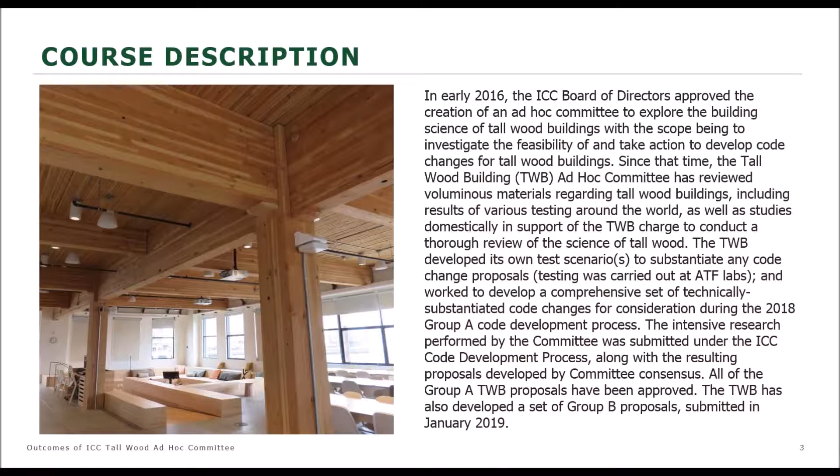Really what we'll talk about today is what is the ICC Ad Hoc Committee on Tall Wood Buildings? Why was it formed? What did they do? Finally, what's the final result or the near final result? Because there are still code changes ongoing in this code change cycle this year. The main focus of the learning today will be knowing about the committee and something about its process, getting a fundamental grasp on the new construction types as they will appear in the 2021 IBC.

That includes their allowable heights and areas, of course, and finally, how appropriate fire resistance is going to be accomplished in these buildings, new provisions for the protection of mass timber with gypsum, and how the gypsum and the non-combustible protection will contribute to the required fire resistance. We'll learn some other things today as well, especially some of the background testing. Jason Smart is with us. He's going to be co-presenting, and he'll be going through what happened in the testing and some of the other fundamental code requirements after I give us this introduction.

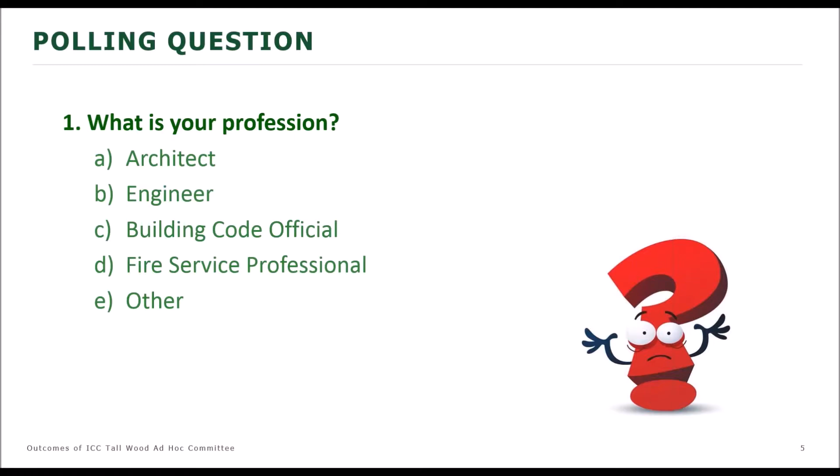Here's an outline for the day. I'll start us off with a little background, a perspective on why a new category of construction called mass timber has developed, a little bit about the old and new engineered wood products involved, and especially about one in particular, cross-laminated timber. We'll move on then to the ICC Tall Wood Building Ad Hoc Committee itself, which the ICC Board of Directors set up to make sure the ICC codes addressed this new system appropriately.

Intuitively, we all knew that with these new systems, the current code requirements, which are based on the assumption of repetitive member framing, traditional joists and studs, were not going to be adequate for this system in terms of parameters and performance. So we'll talk about the committee, its genesis, its work, and the last four items in the outline are the work of the committee. Jason will start in on them, I'll finish them off, ending with building sizes.

You could say that these kind of buildings here are the predecessor to tall mass timber buildings. These are traditional heavy timber buildings, Type 4. These have a long history in many cities and towns across the country and in North America. Most of them are still serving well. They were constructed of solid sawn heavy timber beams and columns. Exterior walls of these buildings are usually non-combustible masonry.

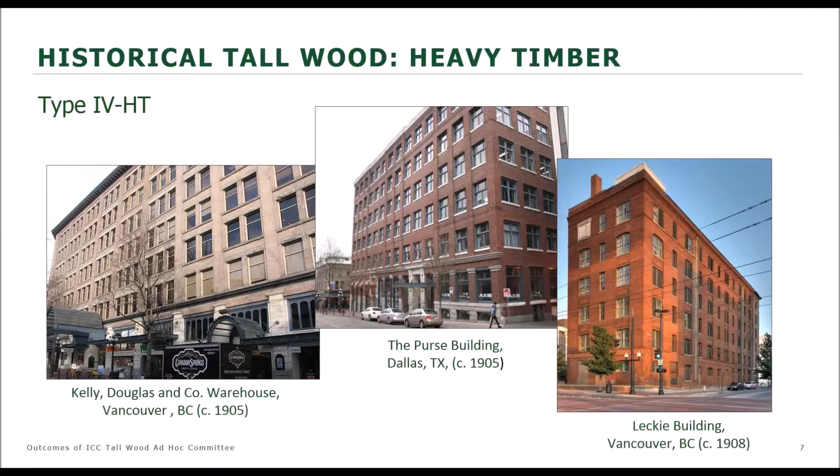Here's a newcomer, the star of the show for mass timber buildings, cross-laminated timber. It represents a sea change in wood construction because of its structural and fire resistance capabilities. They are going to be very different than traditional repetitive member light frame, conventional frame.

CLT, as I'll refer to it, is typically dimension lumber, 2x lumber, laminated in layers, laid up in crosswise fashion, layer upon layer, to make a solid wood floor, solid wood wall or roof. These mass timber panels can be up to 20 inches thick, as long as 60 feet, whatever can be transported down the highway. This one shown here is about 10 inches.

So imagine a building put together as shown on the right, which is a schematic of an actual building in London, Stadthaus building. And you can see that the structural capabilities are going to be far different than traditional repetitive member framing. You'll see from today that the fire resistance characteristics are also very different.

You can see on this slide a little bit of the history of the development of cross-laminated timber, first in France, then Switzerland, Germany. In 1995, press technology developed, making manufacturing easier, more precise. Multi-story buildings in the last years of the 20th century, and then in the first decade of this century, European builders expanded the use of CLT significantly.

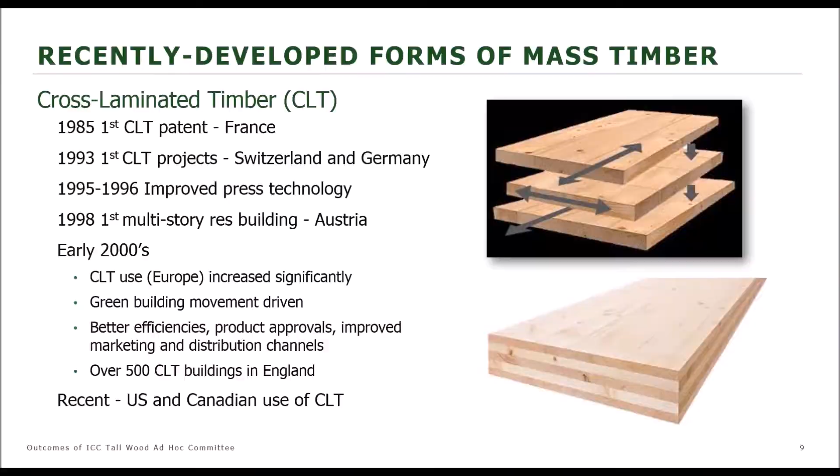I like this photograph because this is a picture of a test facility, a panel being set, lowered into place on the test structure that was constructed for a series of fire tests performed at the Bureau of Alcohol, Tobacco, and Firearms Fire Research Laboratory. And we like this photograph because it shows the scale of what's going on with these big mass timber panels. This one is about 40 feet long, 8 feet wide, 7 inches thick, and weighs about 3 tons, forming the floor ceiling at the top of the test structure.

This panel, by the way, was later repurposed after the testing for construction of residential buildings by architecture students at Yale. So CLT can be used in either horizontal or vertical applications, as walls or as floors. In mass timber buildings, they'll probably be used in conjunction with glue laminated timber. For mass timber floors, the staple will be CLT most likely. We'll talk a little bit more about this test facility and this test series. Jason will cover it well later in the program.

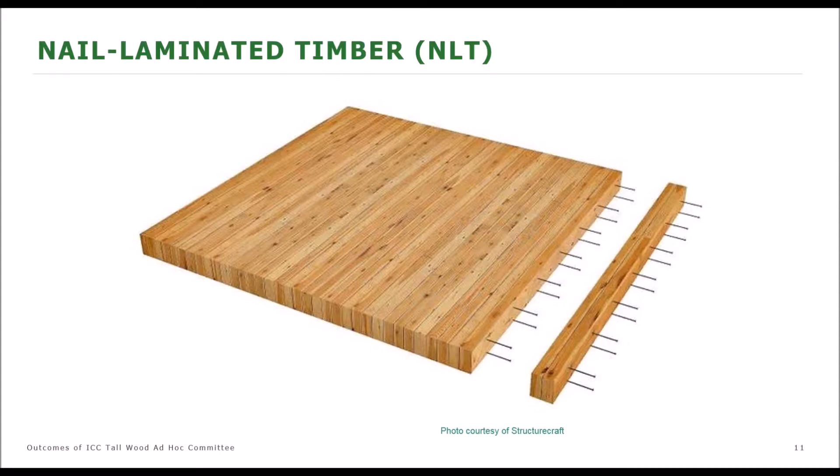There's other mass timber products that are going to be part of mass timber building systems. Nail laminated timber is not a new concept. It's in the code currently as mechanically laminated decking or mechanically laminated timber. It's simply made up of dimension lumber that's nailed together face to face. It can be prefabricated, and often is, and shipped to the site, or it can be actually built on site.

Most of us are very familiar with glulams, glued laminated timber. Beams are well established in design and in the code, and so you're familiar with those. They differ from CLT in that all the layers, the laminated members, are oriented in the same direction. So they do have different structural properties, and CLT, again, is very different in structural properties from glulam.

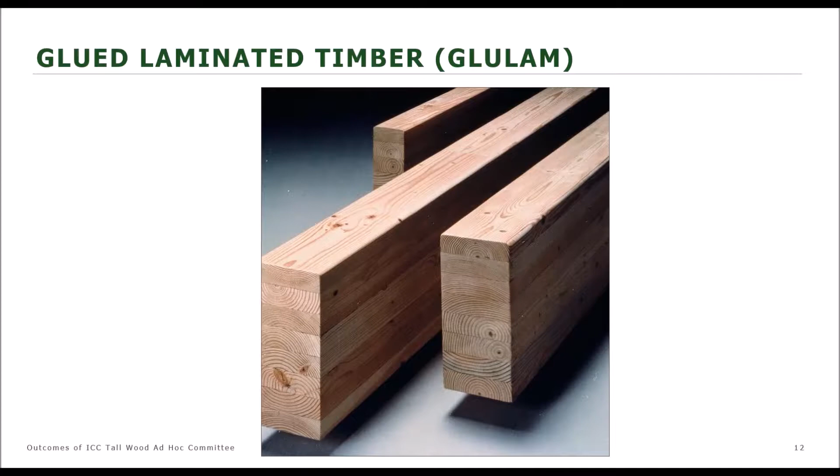But all of a sudden we have a new construction system. It really doesn't fit in the descriptions of light wood frame or traditional heavy timber in the middle. It's the new one right here.

So let's do a poll question, and don't overthink this one. This is pretty easy, pretty light. Go ahead, Marcy. Alrighty. Oh, there we go.

Cross-laminated timber is primarily intended for use in which type of construction? Is that light wood frame, post and beam, mass timber, or all of the above?

So everybody's gravitating toward two answers, so it's going to be one of those two, I would guess. All right, I've got 80% and 30 seconds. So let's see. So 62% say mass timber, 36% say all of the above.

And Paul, what is the real answer? Well, the answer we were aiming for was mass timber. It's a very general question. However, those of you who answered all the above, I could tell you you're right as well, because you can use cross-laminated timber in these other systems. But the intent of the question was just what's it primarily intended for. So well done, everyone.

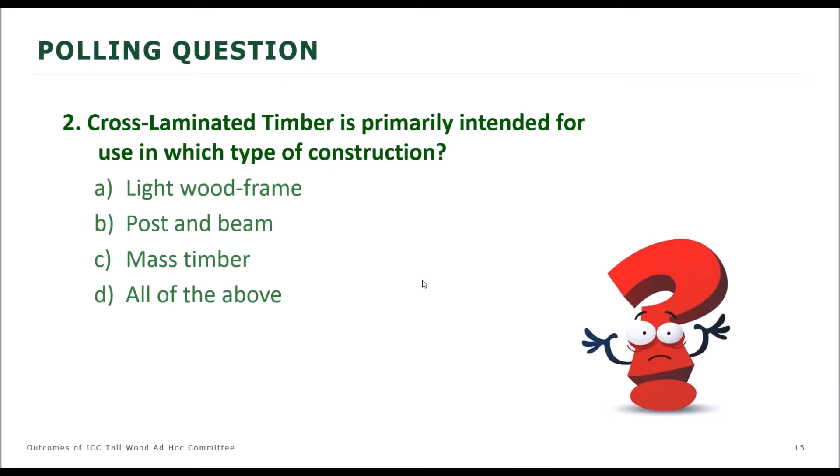Back to our outline. With the new system emerging, it was natural that the International Code Council would want to address it in their codes. The ad hoc committee was assembled. By the way, this picture here is a nail laminated timber floor on top of glulams with glulam columns.

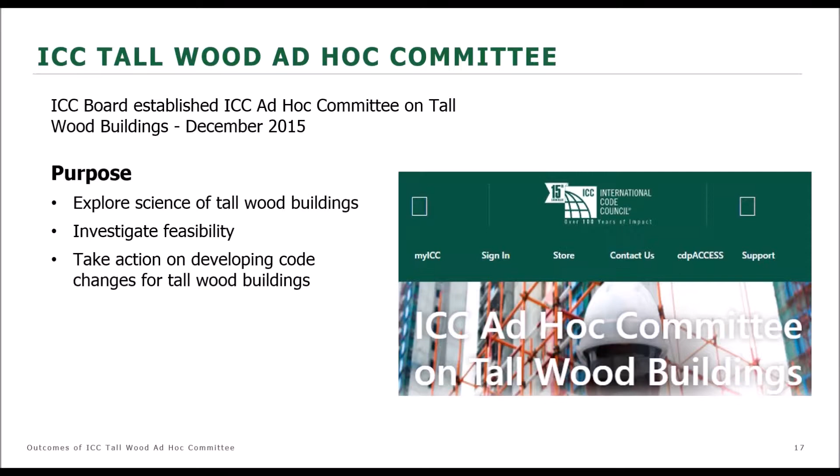So the committee, this was really a significant move for ICC, and actually the code provisions themselves are rather historic, because it's been forever since any new construction types were introduced into the code. But the ICC Board of Directors said, let's explore the science of tall wood buildings, investigate their feasibility from a structural and a safety standpoint, and if warranted, let's take action on developing code changes. Let them come from a consensus committee. And in the end, that turned out to be a very good thing. It was a balanced committee.

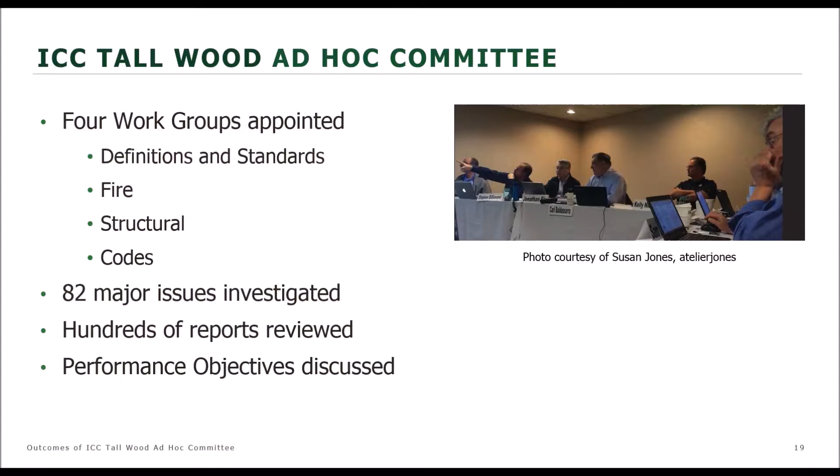The chair of the committee, Steve DiGiovanni, appointed 4 work groups, and they were definitions and standards, fire, structural, and codes. These work groups met together, did some work, came back and presented a total of 82 major issues that should be investigated. Hundreds of smaller issues, hundreds of reports reviewed, and they did identify, first of all, performance objectives for buildings that would exceed the current height limits. In order to begin to contemplate what the code requirements should be, they had to envision how these buildings would behave, and of course fire was one of the primary focuses.

No collapse under reasonable scenarios, a complete burnout of fuel without automatic sprinkler protection considered. Sprinklers are always going to be required in high-rise, but the committee said, if something goes wrong with the sprinklers, the fire department never shows up, let's see how they behave, see how they perform. So it's a very conservative performance objective at the very start. And then how about radiation to and from adjacent properties? If there were a fire, what would happen? Let's look at that.

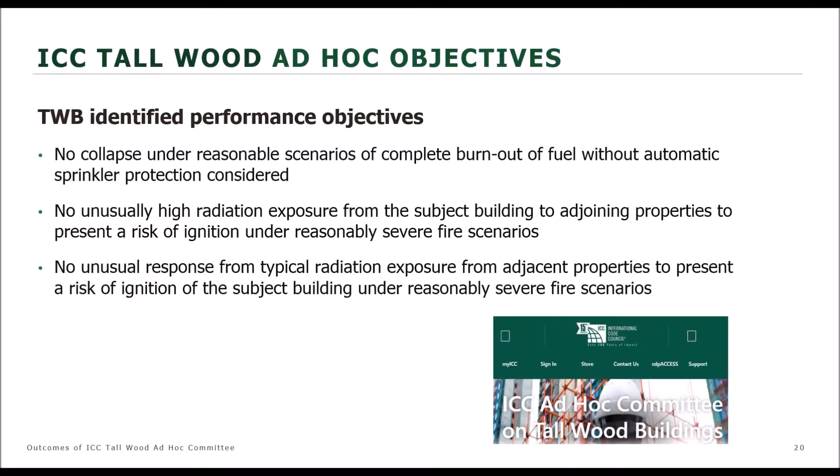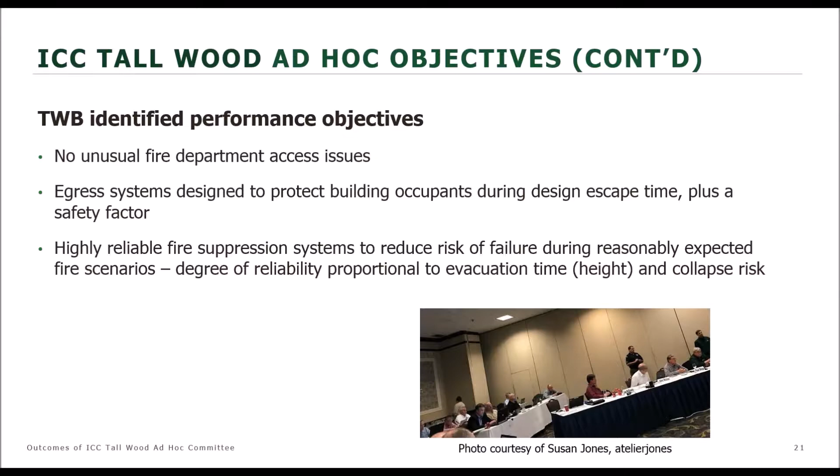No unusual fire department access issues. They wanted to make sure that was paid attention to. Egress systems, just like for all buildings, especially high-rise, designed to get the occupants out, plus a factor of safety. And then finally, suppression systems must be highly reliable, and we'll see even redundant systems in some cases.

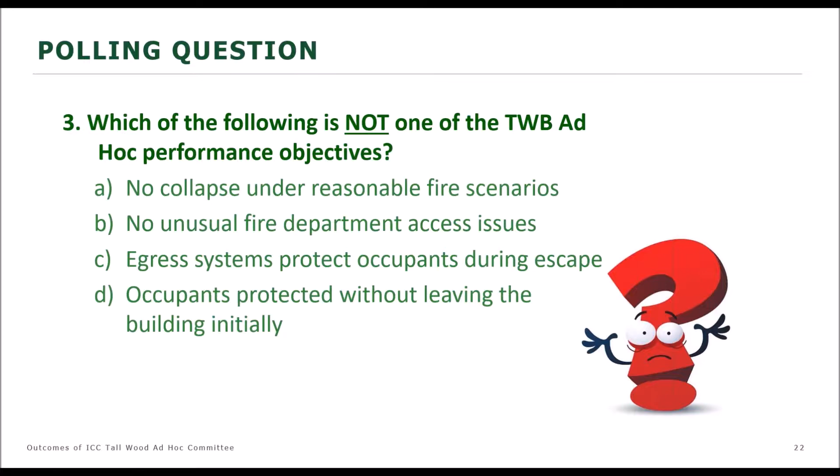I got it, Jason. I think you're on. Okay, great. Sounds good. All right, so yes, that's good.

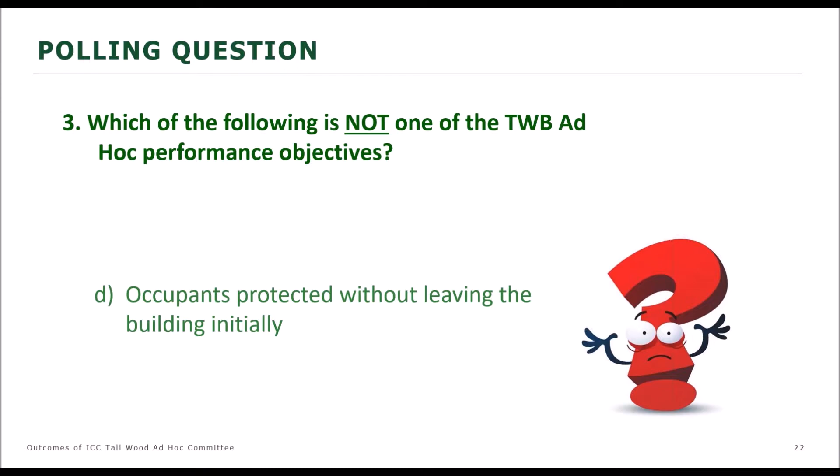I'm glad most people got that right, because obviously occupants should evacuate the building as soon as they're notified of a fire within the building. So that's not one of the design objectives that the TWB ad hoc committee had identified for tall mass timber buildings.

So just to pick up from where Paul left off, I'm first going to describe some of the testing and research that the ICC TWB ad hoc committee considered when developing the mass timber code provisions. Early on, the TWB recognized that it would undoubtedly need testing to validate its proposals. The fire work group, which is a subset of that committee, is one of those 4 work groups that Paul just mentioned a few slides back.

They developed test scenarios, including the physical layout of the test structure, the configurations, and the fuel load. The test structure represented a multi-story condominium or apartment building in which each unit had interior dimensions of 30 feet by 30 feet. So it was basically a square, but there were multiple rooms within each apartment. And we'll show you a floor plan in a minute. There was also a corridor and a stair shaft within the test structure at each level.

The fuel load is based on a North American study of fuel loading for residential use groups. In fact, to ensure rigorous test conditions, furnishings and other combustible contents were added to achieve a fuel load that was equivalent to the mean plus 1 standard deviation. So the actual fuel load used within the test structure corresponded to approximately the 85th percentile of residential fuel loads when compared to that survey.

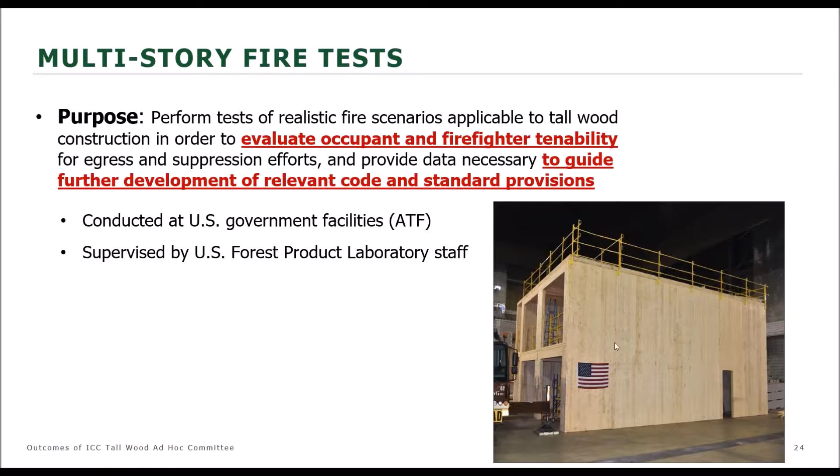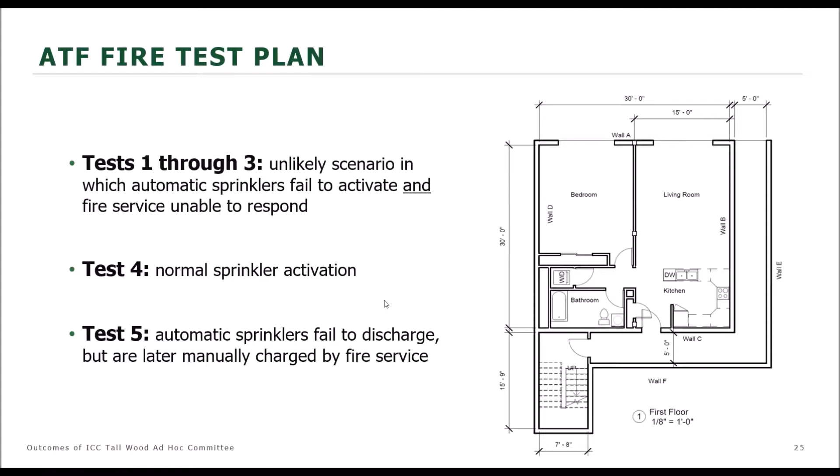Of course, there were some rehabilitations performed between each test in order to repair any damage, such as to the non-combustible protection and so on. But yeah, all 5 of the tests were performed in this same structure. By the way, that's the same structure that Paul showed a photo of as an example of how big CLT panels can be.

So this is the apartment or condo floor plan that was selected by the fire work group for the 5 tests. There was one 900 square foot apartment on each level of the test structure with a corridor leading to a stair shaft on each level. So you can see that these fire tests were truly full scale. It was a full-size apartment or condo on each level.

The TWB Ad Hoc Committee insisted that the construction must be compliant with the current IBC, as well as with all of the proposed code changes that were being developed simultaneously. To achieve this, 20-minute rated entry doors were installed on the apartments, and 90-minute doors were used to separate the stair shaft from the corridors. The corridor was instrumented to determine firefighter tenability and occupant egress tenability within this egress route.

So the scenario represented by the first 3 tests was a highly unlikely one in which you have an unlikely overlap of 2 scenarios. The first part being that the automatic sprinklers fail to activate, and the second part, simultaneously, being that the fire service does not respond at all to suppress the fire throughout the entire duration of the fire. So basically, we're looking at the realm where those 2 scenarios overlap, which makes it even less likely.

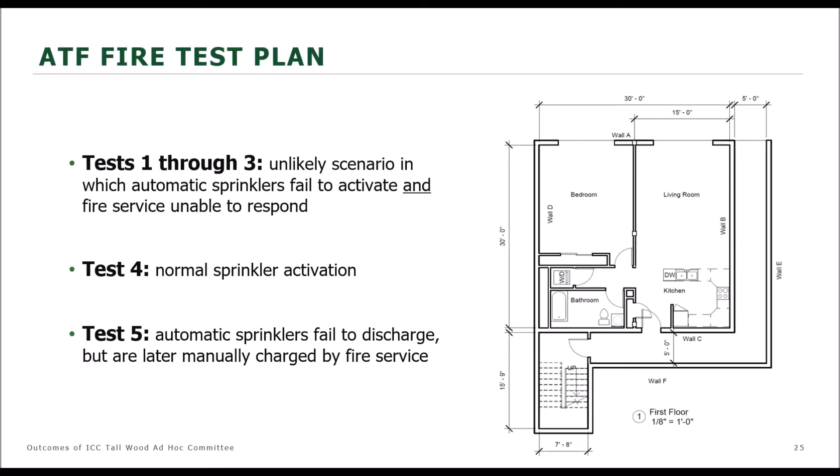And of course, what I'm talking about here is all dealing with the TWB work product and the prescriptive provisions that they developed. They're going to go into the 2021 IBC. I'm not talking about any potential performance-based designs or alternate means and methods or anything like that.

So this is the test matrix for the individual tests within this series. Test 1 served as a baseline to establish the performance of fully protected mass timber. This fully protected configuration represents type 4A construction. And that's what they had envisioned at that point as type 4A. It became known as that later on, actually. But at any rate, test 1 is equivalent to what's now recognized as type 4A.

And then test 2 was an investigation of partially exposed mass timber on the ceiling, representing maximum allowable exposure in type 4B construction. Test 3 was an investigation of exposed mass timber on the walls, again representing the maximum area exposed allowed in type 4B. So tests 2 and 3 were representative of type 4B.

Like I said a minute ago, test 4 looked at sprinkler effectiveness in mass timber construction. It was the shortest lived test. Within about 6 minutes, the sprinklers had effectively extinguished the fire. Test 5 was an investigation of the ability of a manually charged sprinkler system, which is initially incapacitated for some reason, to help control the fully developed fire.

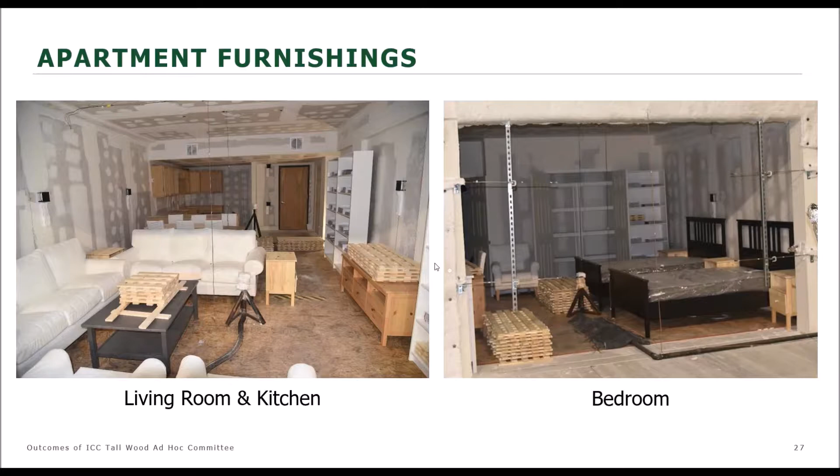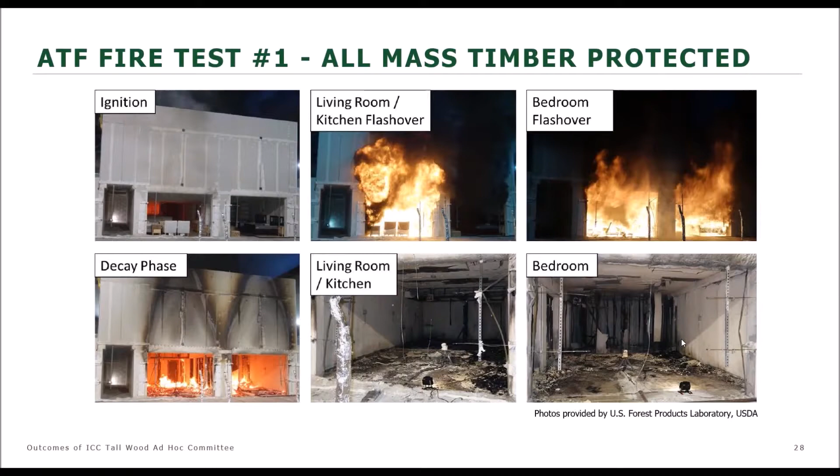In test 2, 30% of the CLT ceiling areas in both the living room and the bedroom were left exposed. This amounted to 20% of the overall floor area of the total apartment. I'll show a slide later on that actually has an excerpt of the code language which specifies these exposed area limits. But 20% is the limit for the ceiling area. So this basically maxed out the allowable exposed ceiling area for Type 4B.

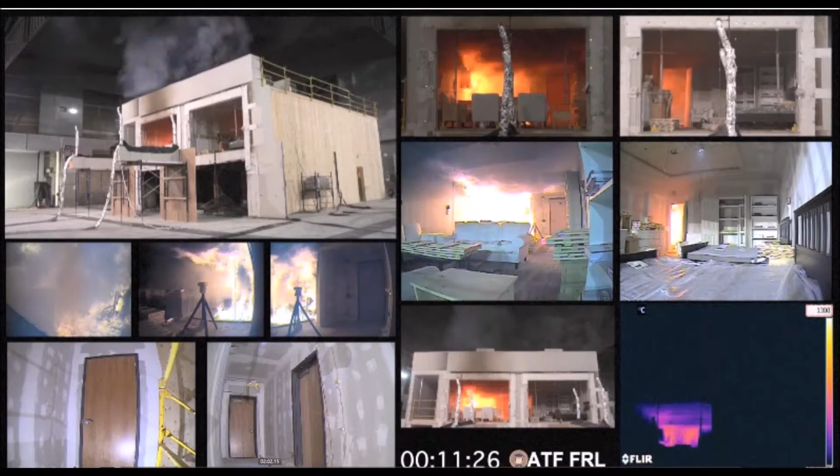I'm going to go ahead and fast forward here a little bit until you'll see it spreading onto the combustible floor covering there. And then I'll fast forward to flashover, which, as I said, occurred at about 12 and a half minutes. And that's right about here. Notice flashover has only occurred now in the left portion there. That's where the living room and kitchen are. Again, the ignition was in the kitchen cabinet, so that makes sense.

And if you look over here in this pane, this is a shot of the bedroom, same with this. You can see the flames and smoke starting to come into the bedroom. The bedroom door was left open, as were all of the interior doors, to allow the fire to spread unhindered. However, the self-closing 20-minute rated entry door into each apartment was left closed for each of these tests, except for one test, which I'll explain later. For each of these first 3 tests, that door was left closed because it would be closed since it's self-closing.

Now we're approaching flashover in the bedroom, which occurred about 4.5 or 5 minutes after flashover occurred in the living room and kitchen. And it just occurred there. You saw the bed start to flash. In this screen, you can see the plumes coming out of both openings now, from the bedroom and from the living room and kitchen. So this is what they'd call the fully developed phase. This is a fully developed fire throughout the entire floor plan of the apartment.

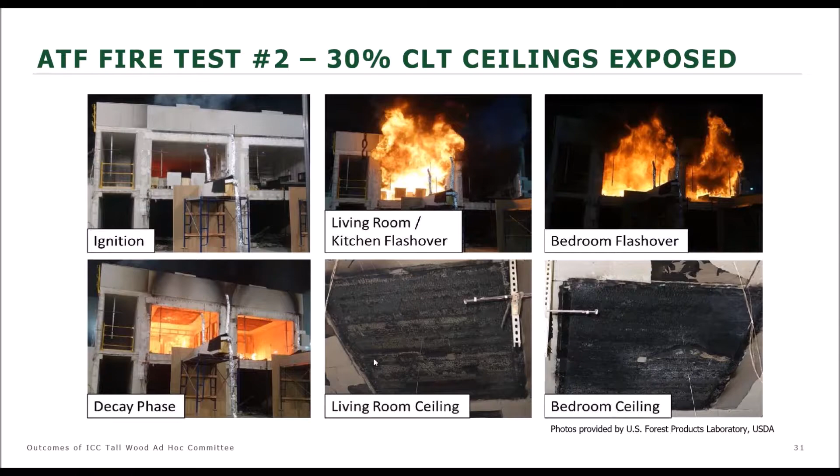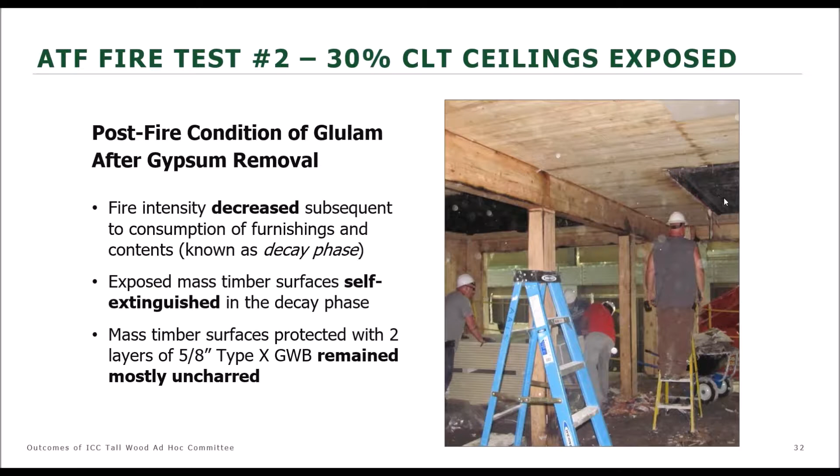In test number 3, wall B was exposed in the living room and wall D was exposed in the bedroom. This layout shows the location of these exposed walls. Notice I say wall D was exposed in the bedroom and wall B was exposed in the living room. I qualify it by saying in the bedroom and in the living room because the exposed portions of walls D and B went from approximately here to about right here. The walls were not exposed in the bathroom or in the kitchen. And then same with wall B, the exposed portion went from about right here where the living room starts to where it intersects wall A. That amounted to about 40% of the total wall area.

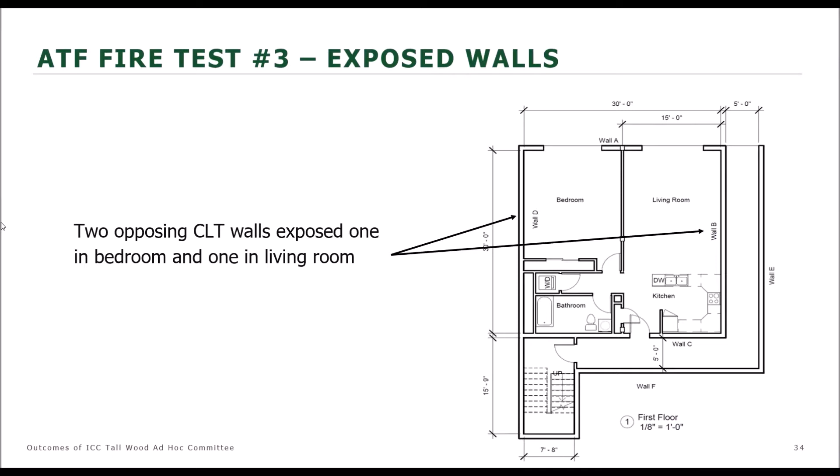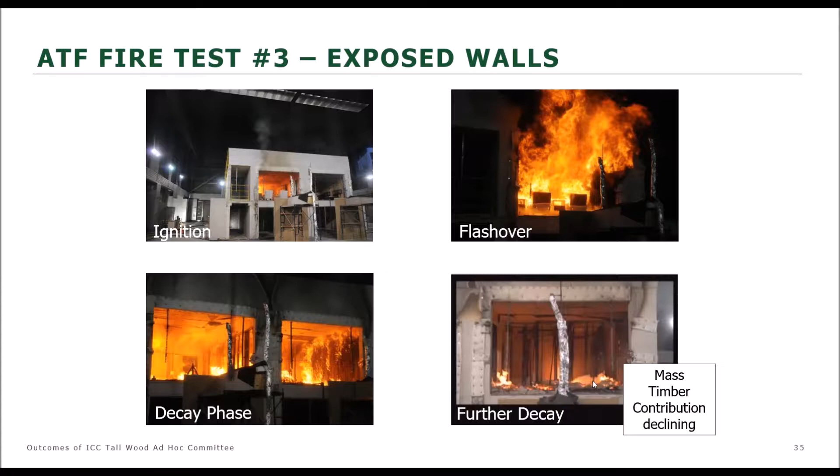Just like for test 4, in test 5, all mass timber surfaces were fully exposed in both the bedroom and the living room. The sprinklers were purposefully prevented from discharging in test 5, though, and then they were manually charged 20 minutes after the time at which the sprinklers automatically activated in test 4. This simulated a scenario in which the sprinklers fail to activate automatically, but are then manually charged at the fire department connection by the fire service upon their arrival at the scene.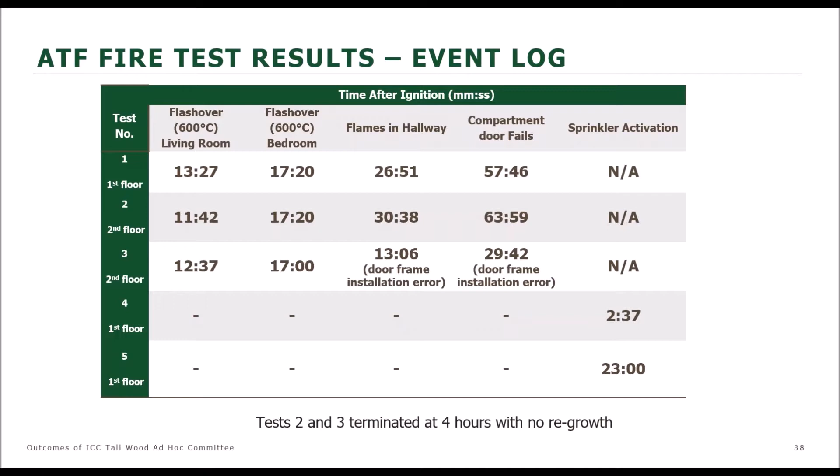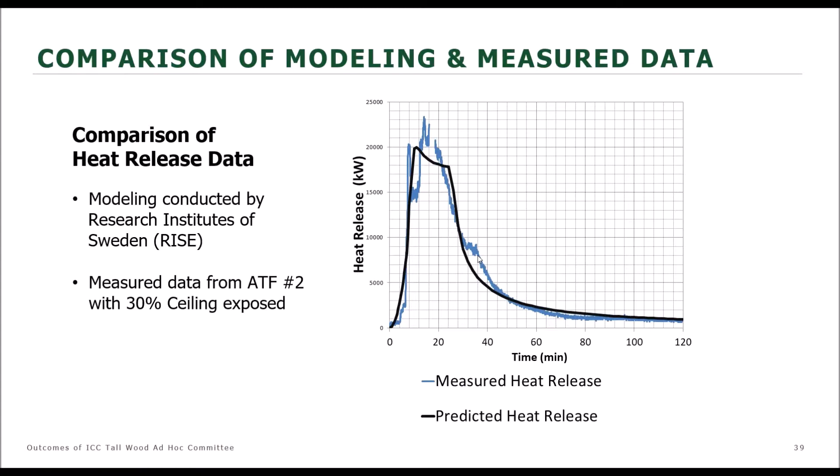The full report that details the results of this test series was published by the U.S. Forest Products Laboratory in 2018, and it's available on their website at this address here, or you can just go onto the FPL website and do a search for GTR 247. All of the tests were also recorded, and these videos are available for free public viewing, either at regular speed or the time-lapse versions like the one that we watched of test 2. You can get to these time-lapse versions through a link on the AWC webpage, specifically the Tall Mass Timber webpage on the AWC website.

So now let's move on to the TWB work product and the resulting new code provisions. The committee decided to approach their work by first defining new types of construction, as Paul alluded to. The proposed new types of construction are created in existing section 602.4 of the IBC. The TWB committee developed a total of 14 code change proposals under the 2018 Group A cycle.

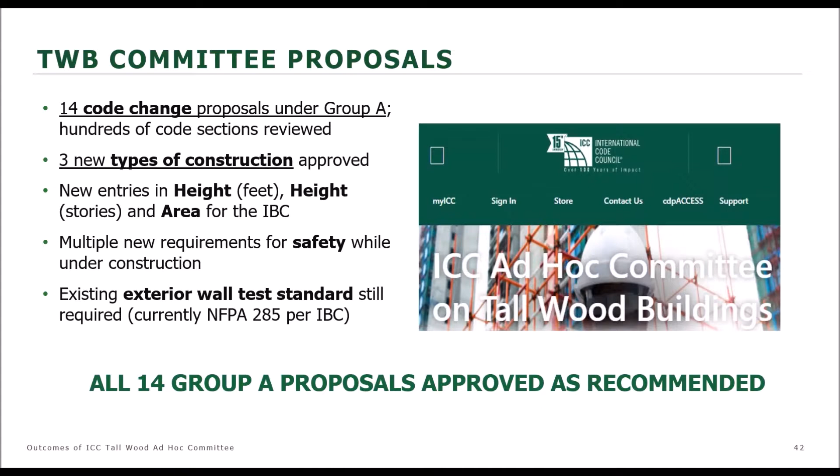The TWB committee found it necessary to develop a couple of new definitions for new terms for inclusion within Chapter 2 of the IBC. Specifically, these are mass timber and non-combustible protection for mass timber. The definition for mass timber is based on the same minimum cross-sectional dimensions that apply to traditional heavy timber. It should be noted that a code change in the last cycle for the 2018 IBC moved those dimensions and other related information back into Chapter 23, which deals with wood construction.

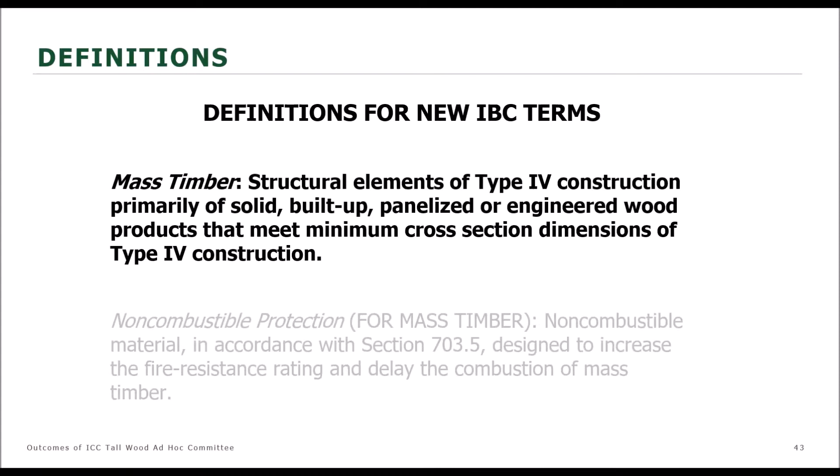It was also necessary to develop a definition for the term non-combustible protection because this term is now used pretty extensively in the new provisions that detail mass timber construction. It applies specifically to mass timber construction, and it is different from other forms of fire protection. Non-combustible protection is designed to increase the fire resistance rating of the mass timber to which it is applied, and also to delay the combustion of that mass timber. We'll talk more about this a little later.

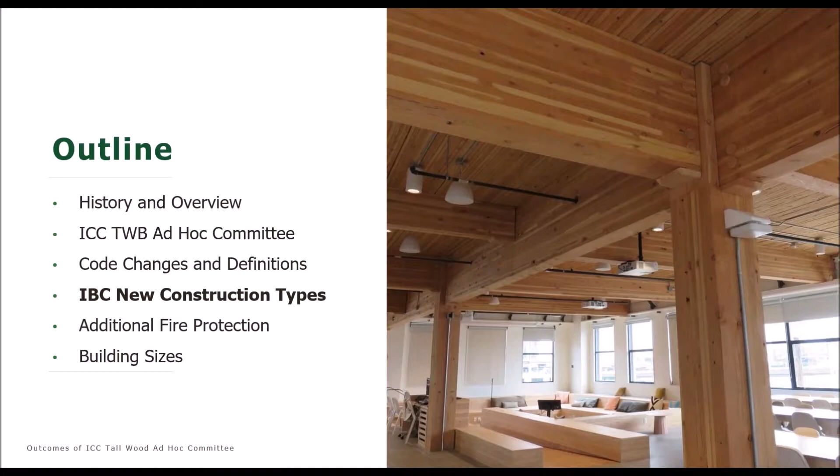Moving on to the meat of the new provisions, let's talk about the new mass timber construction types and the various prescriptive requirements associated with them. 3 new types of construction are described here. They are designated as types 4A, B, and C. Let's look at them each individually now.

And by the way, I wanted to point out these icons here for ease of understanding. On the next several slides, if what I'm talking about only applies to type 4A, then it'll have just this blue icon. If it only applies to type 4B, it'll only have this green icon, and then likewise type 4C will have this icon. If it applies to all 3, then you'll see all 3.

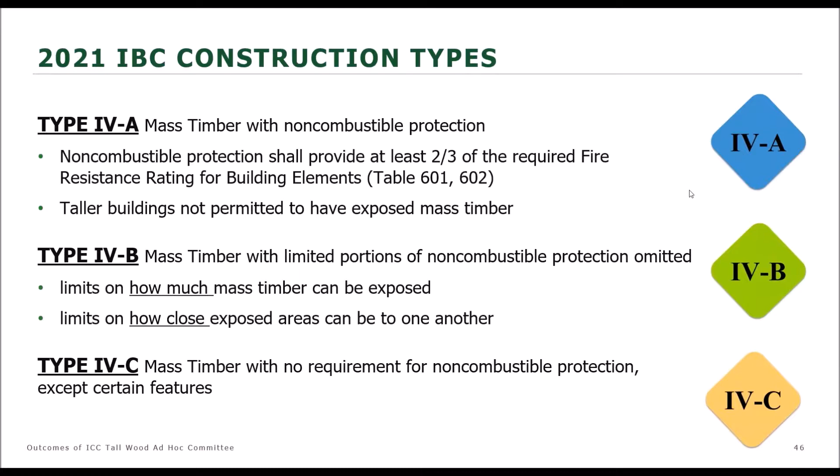The TWB began by acknowledging that fully protected mass timber performed like type 1A construction from a fire standpoint. Thus, they chose to call that fully protected condition type 4A to make it analogous. And in keeping with this analogy, type 4A also requires the fire resistance ratings that are the same as those required for type 1A. But an additional requirement for type 4A that doesn't apply to type 1A is that no less than 2/3 of that fire resistance must come from non-combustible protection. We'll talk about what non-combustible protection is. I kind of went through the definition, but we'll get into more details on exactly what that means later on.

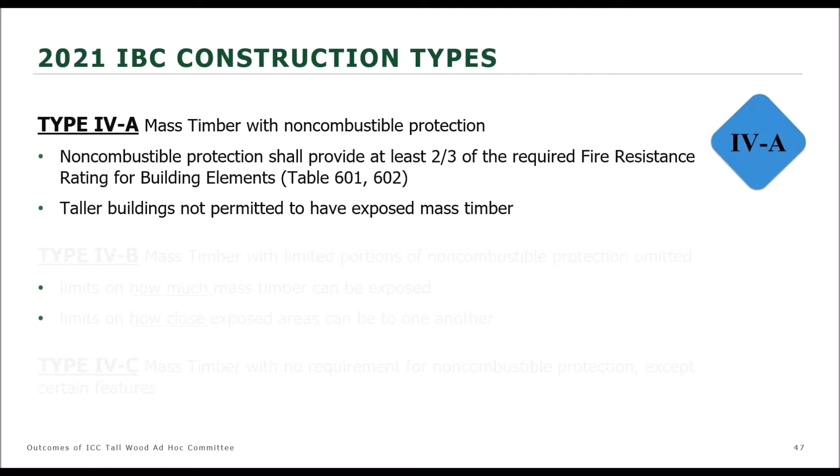Because the mass timber elements will be fairly large for structural purposes, they also have inherently a significant degree of fire resistance even without the non-combustible protection. This fact has been recognized of heavy timber construction for over 100 years. It should be noted that because of the height limitations for types 4B and 4C, which are more strict than that for type 4A, the taller buildings, and by taller here I'm referring to between 12 and 18 stories, will only be permitted prescriptively under type 4A, which doesn't allow any exposed mass timber. So really the tall mass timber buildings, the ones higher than 12 stories, will not have any exposed mass timber if built prescriptively.

A similar correlation was drawn to type 1B. So the partially protected condition was called type 4B, to continue with that analogy. Type 4B is like type 4A, except that non-combustible protection may be omitted in certain locations. And we'll talk more about the limitations on those permitted omissions. And of course, as I just mentioned, the height limitations for type 4B are more restrictive than for type 4A. From a fire safety standpoint, these height and area limits counterbalance the fact that you can have mass timber surfaces exposed in certain limited areas in type 4B. The new code provisions place specific limits on how much area of the mass timber can be exposed on various surfaces, and also how close those areas can be to one another.

Type 4C requires non-combustible protection only in certain locations, such as concealed spaces, stair shafts, and the outside face of exterior walls. That said, it is still required to achieve the fire resistance ratings of tables 601 and 602 by its own characteristics, meaning the inherent fire resistance of the mass timber itself. In exposed areas, fire resistance is primarily achieved by additional wood cover that is above and beyond that which is required to carry the structural load. These fire resistance ratings are the same as those that are required of types 1B and 4B, which we'll look at now.

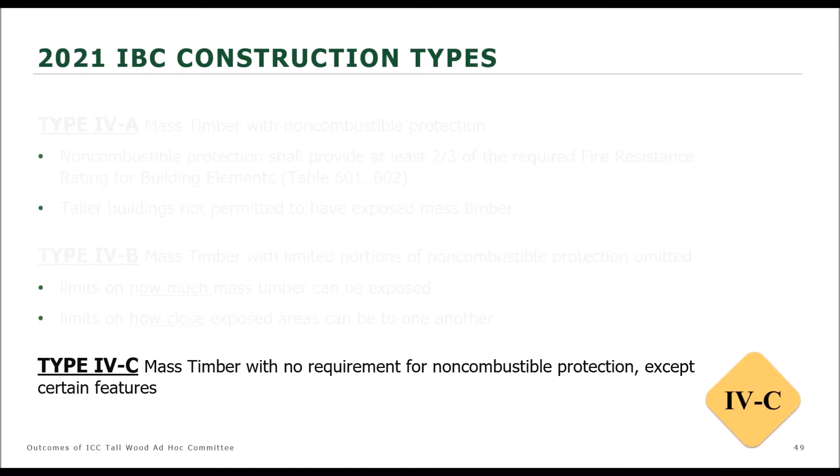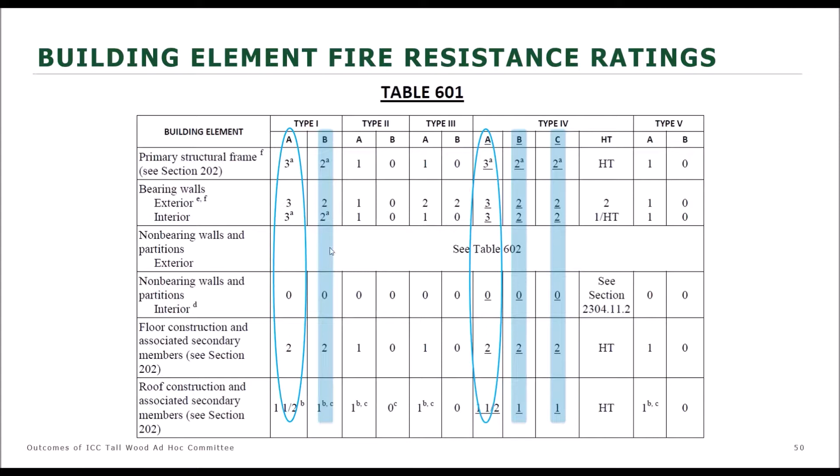As for the existing Type 4 construction using heavy timber, the TWB committee made a decision not to make any changes to this construction type. That is, other than to change the designation to add the -HT to the end of it in order to better distinguish it from the new Type 4 construction types.

This type of construction has existed for many decades. I'm talking about Type 4 HT now. And so the committee just decided to leave well enough alone here. One of the reasons I point this out is because I want to stress that the new mass timber construction types 4A, B, and C, are not the same as Type 4 HT. There are some significant differences between them, and we'll talk about those unique aspects for the new mass timber types of construction in the next few slides.

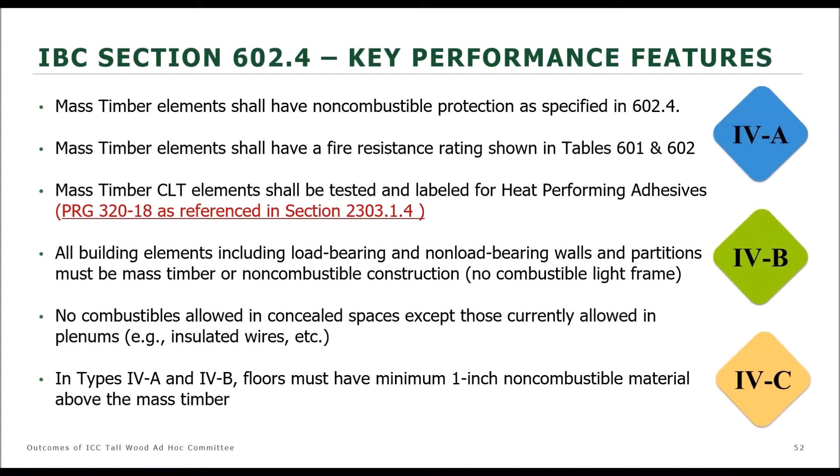In fact, no combustibles are allowed in any of the concealed spaces, except for materials that are currently allowed in plenums by the International Mechanical Code and NFPA 13. An example of this would be insulated wires, so that they would be allowed, but no combustibles such as light frame wood or anything like that in the concealed spaces.

Here's an excerpt from section 602.4, which applies to all three of the new construction types. At the top of this excerpt, you can see the provision requiring CLT to be qualified in accordance with PRG 320-2018. PRG 320, by the way, is the material standard that is referenced in the IBC for CLT. So any CLT used prescriptively under the IBC is required to comply with PRG 320. And specifically, the 2018 version is what's going to be referenced for CLT used under the 2021 IBC, which is where this provision is going.

As you can see from the strike through and underline here in this slide, this paragraph was modified through a floor mod at the code hearings. This modification was considered acceptable because the 2018 version of PRG 320 included adhesive qualification tests to prohibit heat delaminating adhesives. So it actually provides a more comprehensive and robust means of addressing the issue than the previously proposed language did. And it effectively prohibits use of adhesives which can undergo heat delamination, leading to the type of fire regrowth that the committee was concerned with, the TWB committee.

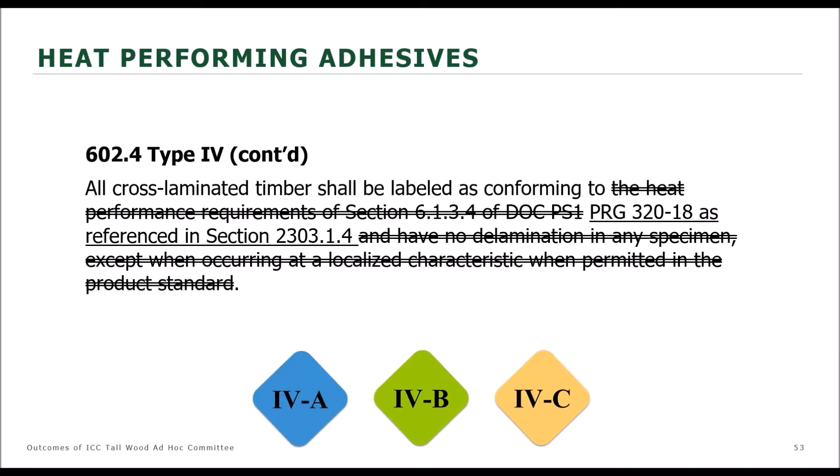Regarding shafts, elevator hoistways, and the like, in buildings up to 12 stories, interior exits, elevator hoistways, and shafts are permitted to be constructed of mass timber elements. However, those mass timber elements are required to be protected with non-combustible protection. And then in buildings taller than 12 stories, interior exits and elevator hoistways are required to be constructed of non-combustible materials. An example of this can be seen in the 18-story Brock Commons building in British Columbia, which Paul showed on the first slide of this presentation, and he talked a little bit about. It has reinforced concrete shafts.

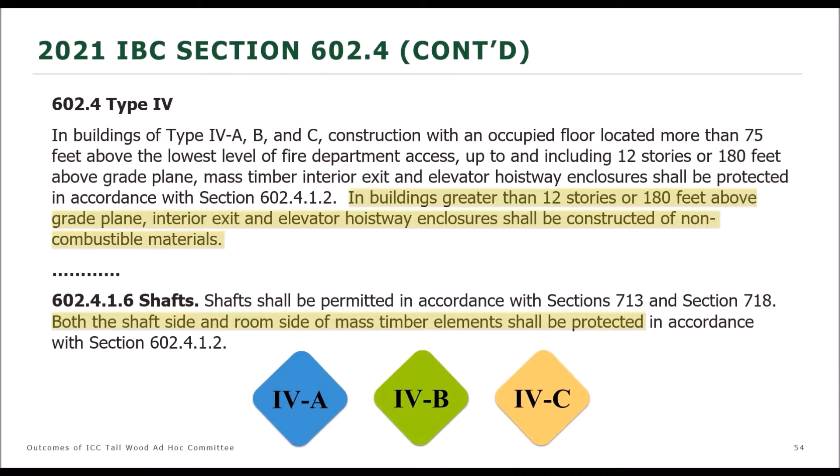In all three of the new construction types, everything outboard of the mass timber and the exterior walls is required to be non-combustible, except for a WRB, a water-resistive barrier, which is required to meet certain fire performance thresholds. Also, mass timber walls are required to have at least one layer of 5/8" type X gypsum board or equivalent non-combustible protection on the outside. I'll note that on top of that, additional non-combustible protection is required where Table 602 stipulates a fire resistance rating of greater than 1 hour.

So if Table 602 says you have to have greater than 1 hour fire resistance rating from the exterior side on exterior walls, then you'll actually need more than just one layer of 5/8" type X on that exterior side or exterior face of the mass timber in the exterior walls.

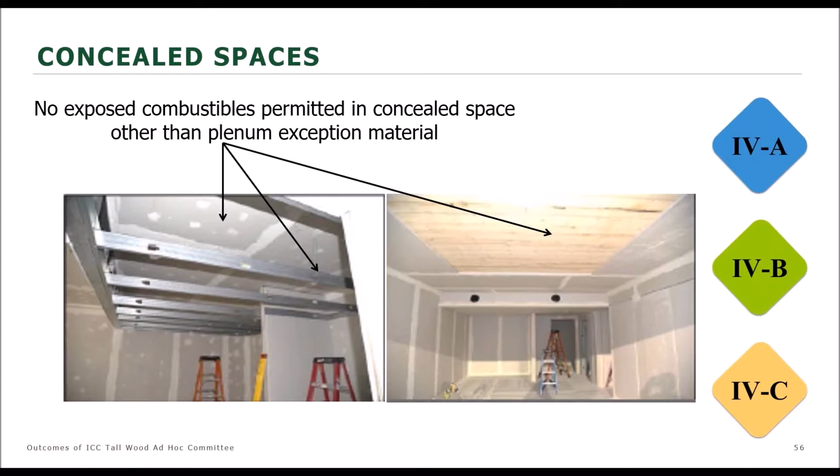So now let's take a look at some of the other provisions that are specific to just one or two of the new construction types rather than all three. First, we'll talk about those that are specific to type 4A. All mass timber surfaces in type 4A are required to be protected with non-combustible protection. There's no exceptions in type 4A. And that non-combustible protection has to be sufficient to provide at least 2/3 of the required fire resistance rating.

You can never have less than 2 layers of 5/8" type X gypsum on interior surfaces, or equivalent non-combustible protection to 2 layers of 5/8" type X. Also, mass timber floors must have a minimum 1-inch thick non-combustible topping. Typical examples of this 1-inch thick non-combustible topping would include cast-in-place concrete or gypsum concrete.

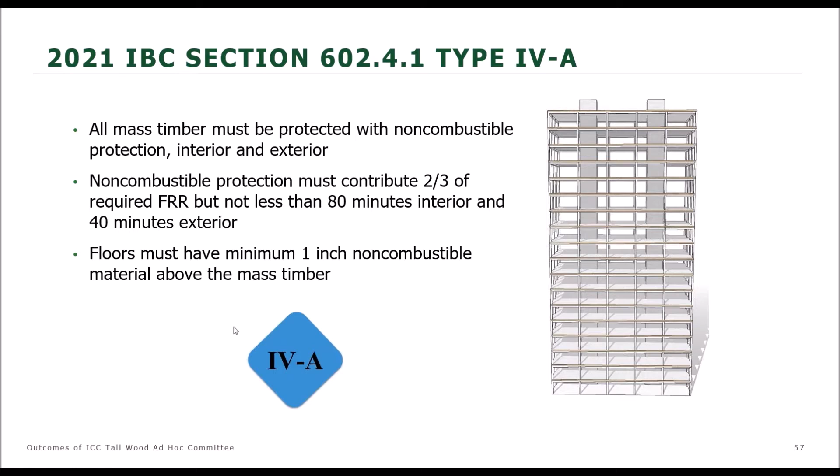By the way, this requirement for the 1-inch non-combustible material over the mass timber floor doesn't just apply to 4A, it also applies to 4B. Just as in type 4A, mass timber surfaces in type 4B construction are also required to have non-combustible protection providing 2/3 of the fire resistance rating. However, there are exceptions in type 4B.

But there's a limit, and I'll get to the equation that shows exactly what that limit is in just a minute. But first, let me show that there's a fourth exception that can apply simultaneously with either of these first three. And that is that mass timber columns and beams, which are not an integral part of walls or ceilings, are allowed to be left unprotected. And that applies, of course, to type 4B. The TWB committee felt that this was justifiable because typically the total surface area of standalone columns and standalone beams is relatively small compared to the area of walls and ceilings.

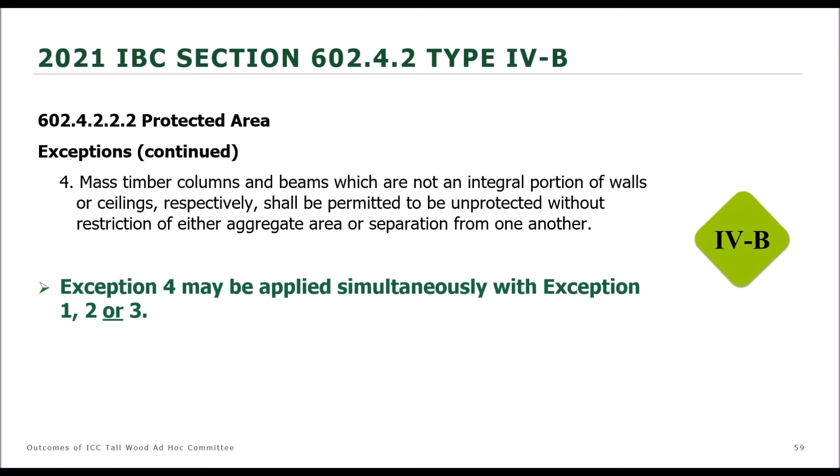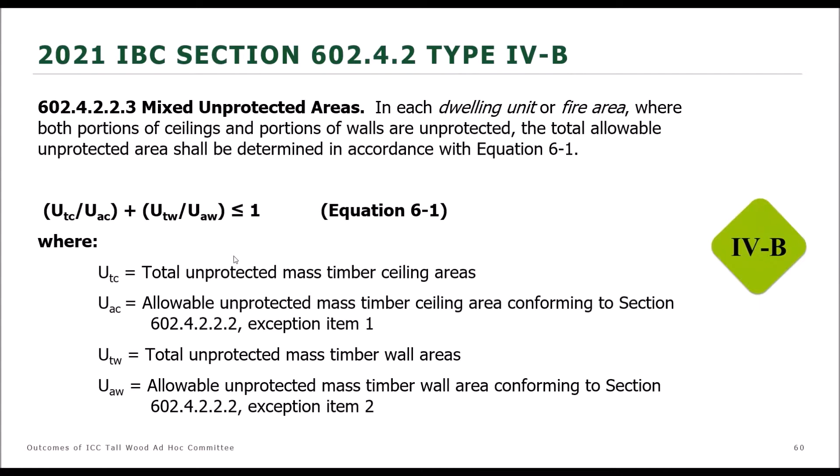Also, if the combination wall ceiling exposure option is used, the exposed portions of walls and ceilings must be separated by at least 15 feet from one another. This minimum 15-foot distance is measured horizontally between the exposed areas of mass timber.

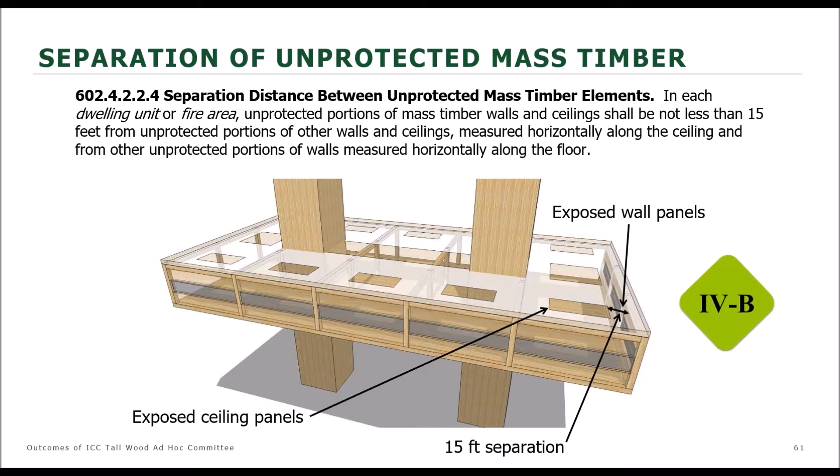Obviously, this is intended to reduce the amount of potential radiative heat flux that one area might receive from another in the event of a fire. And then lastly, there's type 4C.

Type 4C is sometimes described as a mass timber construction type in which all of the mass timber surfaces are unprotected. However, I like to point out that this is actually an incorrect generalization. Non-combustible protection is actually required in numerous locations within type 4C construction. And these include, as I touched upon earlier, the outside surfaces of mass timber in exterior walls, and then also mass timber surfaces within concealed spaces, and also both the inside and outside surfaces of mass timber within

shafts. Also, while non-combustible toppings are not required for mass timber floors in type 4C like they are in types 4A and 4B, there is a requirement that floors in type 4C are required to meet the provisions of IBC section 804. This section applies, of course, generally to other types of construction as well.

So with that, it's been a while since we've had a polling question. I'll hand it back to you, Marcy, to ask this one. Sure thing. So which of the following are proposed new types of construction? Is that 4A, 4B, and 4C? Or is it 4 heavy timber? Or 1 heavy timber, 2 heavy timber, and 3 heavy timber? Or all of the above?

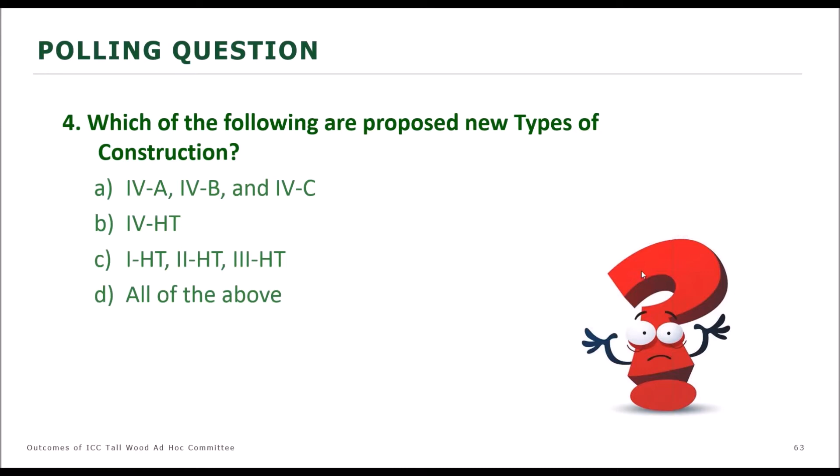Okay, thanks, Marcy. Great job, Jason. Let's get off that screen.

So we have some additional fire safety features we want to talk about for the new mass timber construction. And I want to emphasize one of the principles here, and that is, this is a new principle. It only applies to mass timber in the code. We're all used to tested assemblies that achieve fire resistance. We're used to calculating fire resistance of exposed mass timber or exposed heavy timber elements. But this principle, this is the code text, and Jason explained this. I just want to reemphasize.

The fire resistance rating of mass timber elements consists of the fire resistance of the unprotected element added to the protection time of the non-combustible protection. So for instance, if the floor is a 2-hour floor, there may be some inherent fire resistance or designed fire resistance in the exposed floor. You can add that to what's provided with the gypsum to get the total fire resistance. There's 2 ways to do this, by the way.

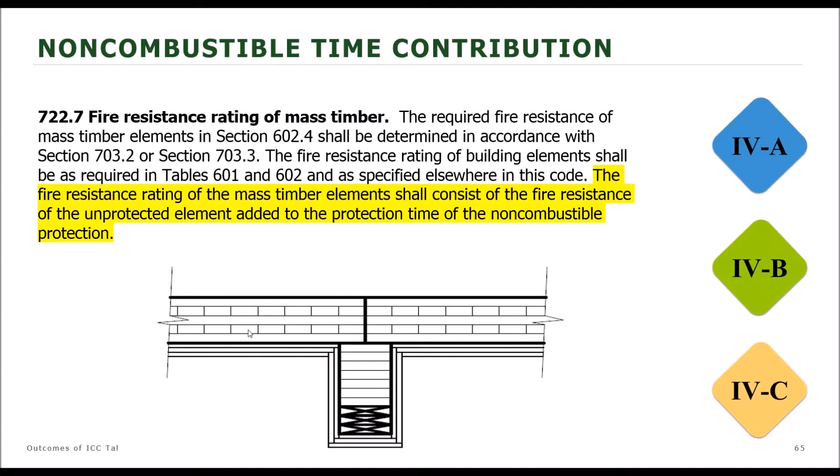So the question is, how do we determine the amount of fire resistance provided by the non-combustible protection? One way to do that is by testing. You set up a test program where you're testing the unprotected element, like the unprotected CLT floor, and you test it to failure by ASTM E119 or UL 263. Take the same element, protect it with non-combustibles, test it again. The difference in fire resistance rating time to failure, that's the amount of contribution the non-combustible protection is providing.

The general principle, as we said, is it must provide at least 2/3 of the overall required rating of the element. There's also a prescriptive option for achieving this. So in Chapter 7, you'll see 2 new tables. Fire resistance rating of the element over here, required contribution from the non-combustible protection in minutes over here. You want to know how many minutes you get with these types of gypsum wallboard? Here they are. Right.

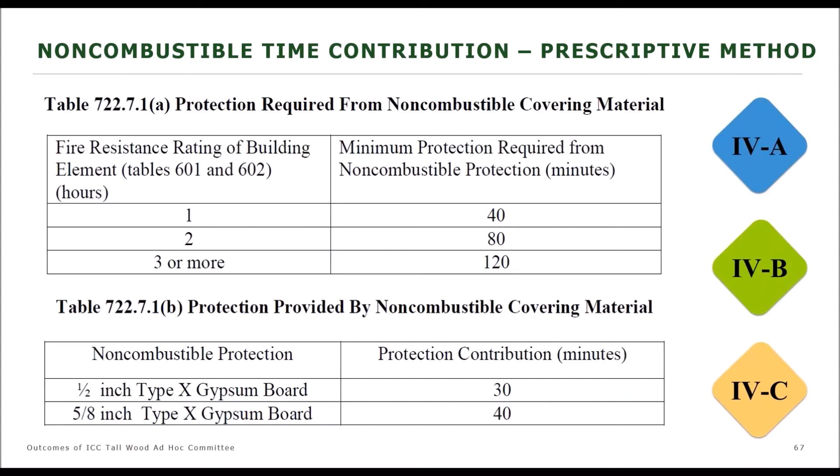Remember, this also applies to type 4C because there are certain elements in type 4C that do need to be protected, such as exit shafts. Attaching the gypsum, the code will contain requirements for specific attachment of the gypsum. They do have to be staggered layers, offset layers, a stair-step profile at wall to ceiling and wall to wall intersections. Primarily important wall to ceiling, where the gypsum ceiling is resting on the wall at each layer.

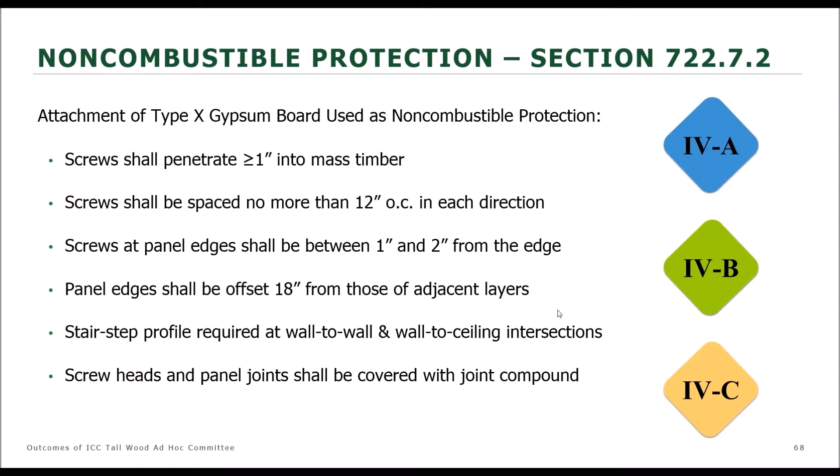Super tall buildings currently in the IBC, when they get to 420 feet, their sprinkler systems have to have a redundant, in other words, 2 separate water supplies. This requirement was chosen to kick in at 120 feet for tall mass timber buildings.

Another requirement, 703.9, you'll find sealing of adjacent mass timber elements. So a mastic or a caulk or an adhesive in between mass timber elements where they join. This is not for any quantifiable fire resistance. This is to prevent air movement, to prevent smoke movement throughout the building in the case of a fire.

And then finally, this non-combustible protection on mass timber elements is very important. So what if someone who's using the building decides to remove it? The committee said, let's put a provision in the fire code that requires owners to document their maintenance of the non-combustible protection on the mass timber, so that they have a record of it if something is damaged or removed and a fire official makes an inspection of the building.

They're going to be able to receive from the owner, and it is a responsibility of the owner to maintain the fire resistance. They're going to be able to ask for that documentation, inspect any areas that perhaps were damaged or not protected.

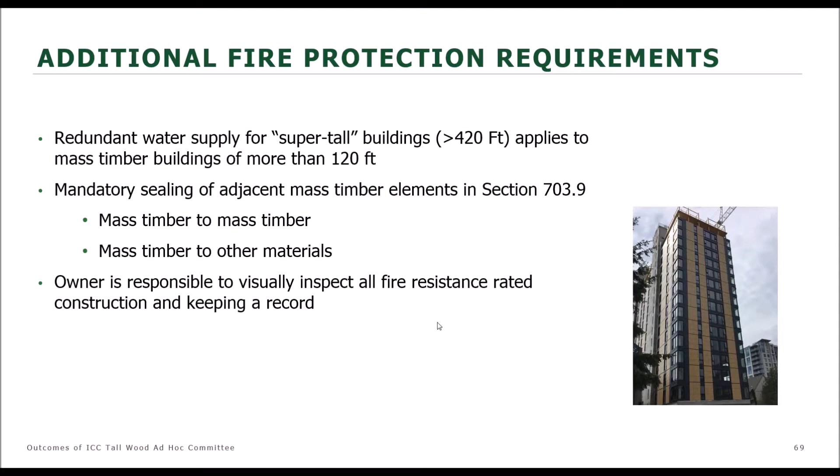How about during construction? Construction fires are a very serious matter. We do have a construction fire safety coalition. You can find that information on our website. For mass timber buildings, it will also be important. All the typical requirements for fire safety during construction in Chapter 33 of the IBC and the IFC will apply. Standpipes when the building reaches 40 feet, water supply for fire department operations, access to the site, even fire watches at the order of the fire official. It's not listed here. These will all kick in as is currently required.

But in addition, as mass timber buildings go up, the provisions are going to require that the protection begin as the building goes up. So the idea here is we don't want a lot of exposed mass timber at a very vulnerable stage of construction. As we get taller, as we get up beyond 4 stories above what's protected, before we go higher, we're going to have to protect the first story that's more than 4 stories below the floor of active construction.

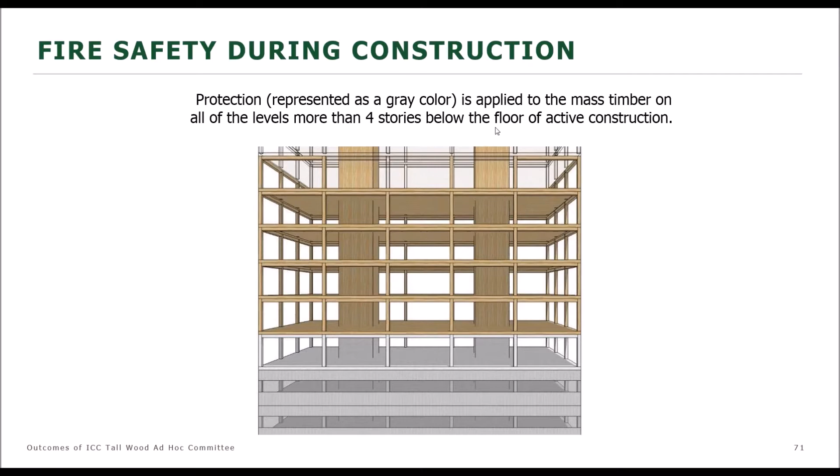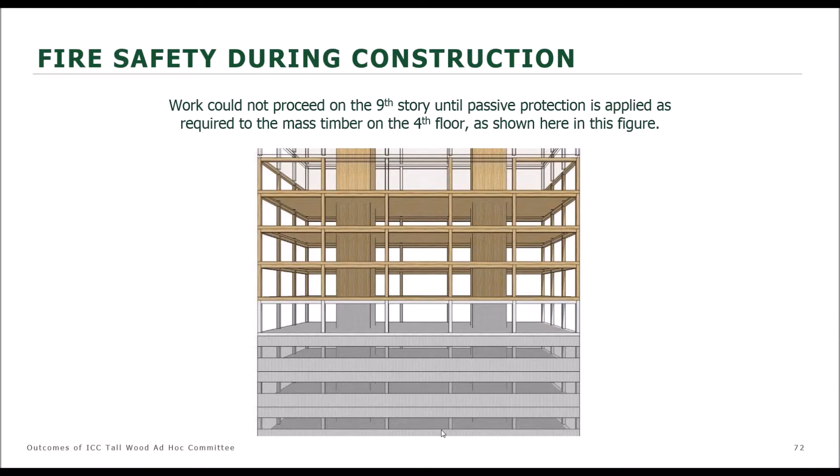So if this is the 9th story, before construction begins at that, you have to protect this story here, which would be the 4th story, and then you can move up. This is simply 1 layer of gypsum that's required as an initial deterrent against ignition, even if there's more gypsum required to be installed later. You have prescriptive fastening for the exterior, the required exterior non-combustible protection of 40 minutes. Just so you know that's in there.

I'd like to talk now about 3 particular changes that Jason mentioned. They're happening in this code change cycle, Group B. The first one has to do with connection protection. The heading of this new section as it stands right now says connection fire resistance rating. However, as we all know, there's no standard in the code currently for the testing of connections and their fire resistance. What this is talking about, if you're familiar with current heavy timber design and when heavy timber construction is required to be fire resistance rated. It's not always required to be fire resistance rated, but when it is, the connectors between rated elements have to be protected with materials that equal the same fire resistance as the connected elements.

That same principle will be carried through with this provision that's been approved by the Code Development Committee, and will be up for a vote in the fall and is anticipated to get approval because it has good consensus. The trigger here, or the goal or the focus, is the temperature rise on the connector itself, but the principle is the same. You will be protecting the connections or the connectors with materials that equal the fire resistance rating of the connected elements, of what their required rating is.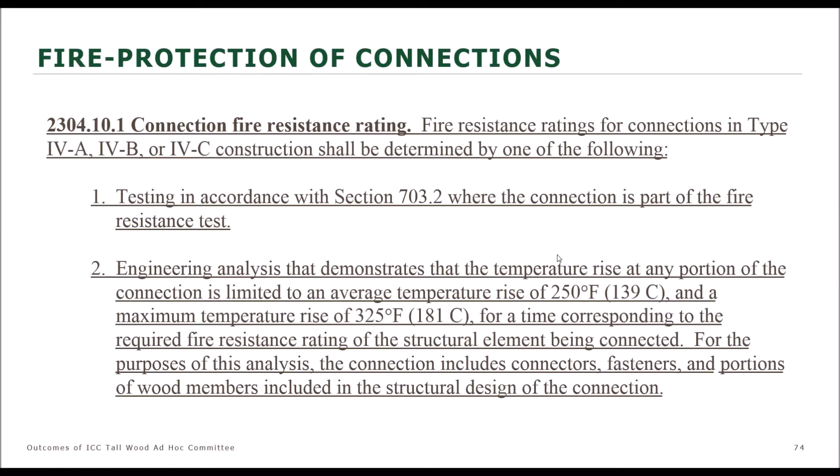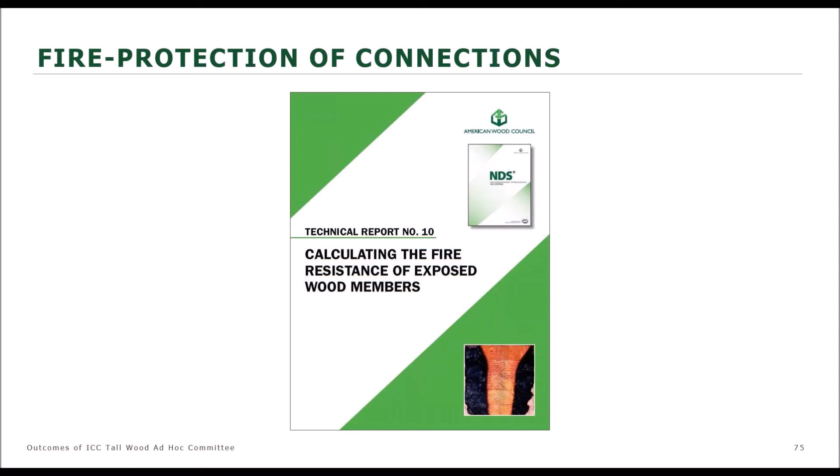You have a good resource now. Technical Report number 10 has been revised to include all provisions for CLT, including the protection of connections and connectors. So there are some design examples in here, and you can download this off our website.

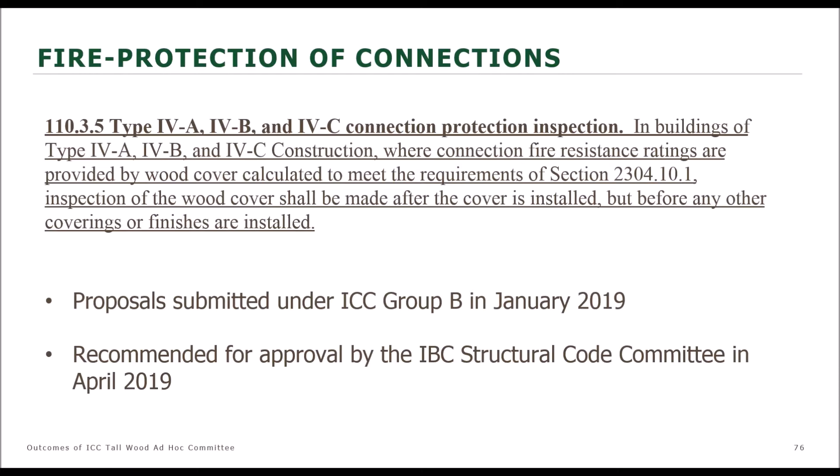Among the Group B proposals are the requirement to inspect that cover for connections back in Chapter 1. And there will be special inspections required for mass timber construction. They will be listed in a table, if this is approved, we're assuming it will be, in Chapter 17. You can take a look at that. In the current monograph, you can find the committee reasons for that.

I'm going to go back to a poll question now. Marcy? Yep. So we're going to fly through these real quick, but in Types 4A and 4B, what minimum contribution must be made by non-combustible protection? Is that half of the required fire resistance rating of the building element, 2/3 of the required fire resistance rating of the building element, 3/4 of the required fire resistance rating of the building element, or none of the above?

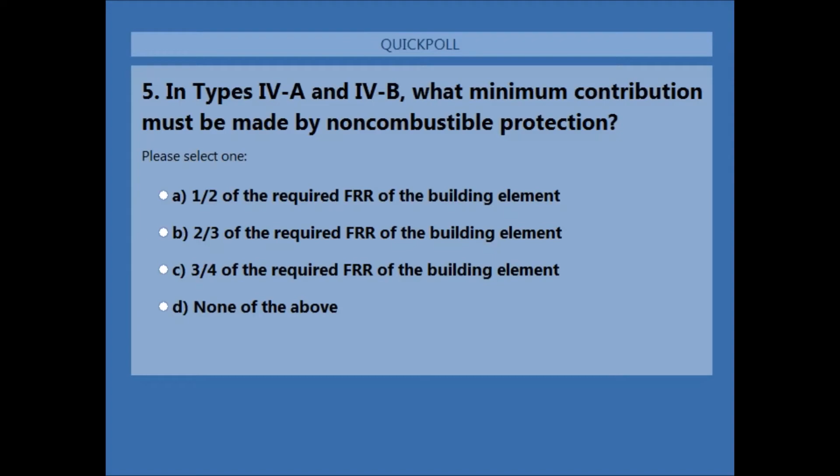All right, 61% say 2/3 of the required fire resistance rating of the building element. What do you say, Paul? They're correct. Excellent. So the principle is required rating of the element, 2/3 of it has to be provided, at least 2/3 have to be provided by the noncombustible covering.

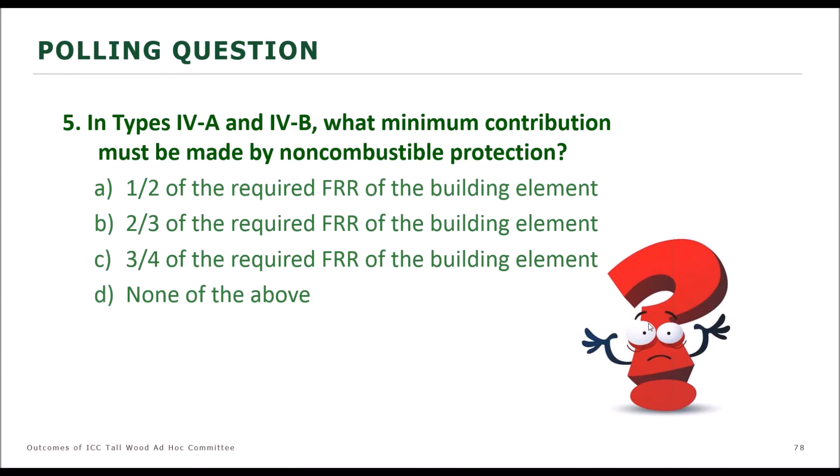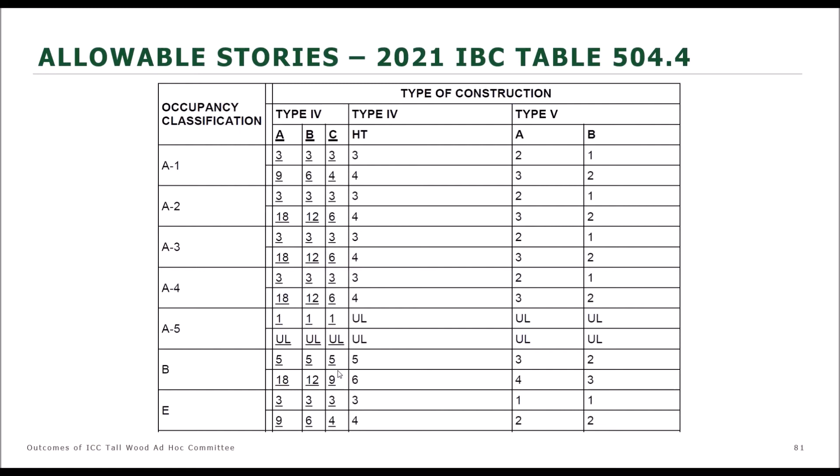And by the way, I'll go back up to that for a moment. These rows over here are non-sprinklered and sprinklered, but at high-rise heights, they're always required to be sprinklered, and even at low-rise, Group R is required to be sprinklered. About height in stories, here's the top one, B, 18. It's the same as for Group R. That's for type 4A, 12 stories, 9 stories. This is just showing Group B in the top of the table here. You can see that it's reduced for certain occupancies. The committee used some judgment about this based on relative risk and function of the building. And for Group R, that 9 turns into an 8.

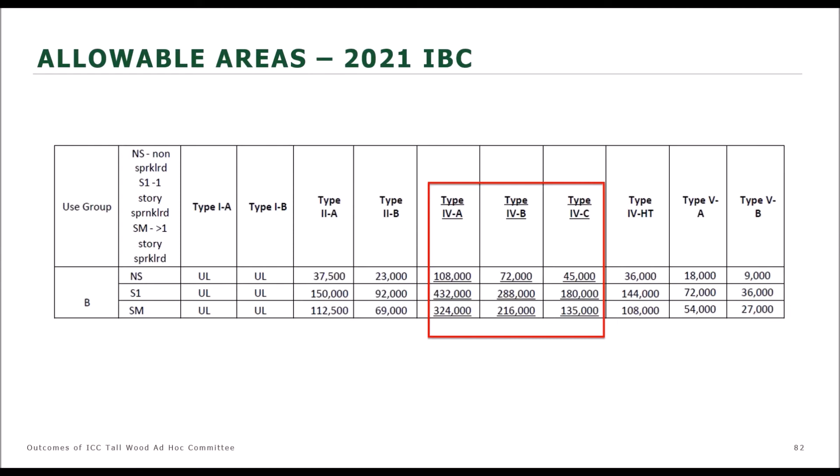Allowable areas are increased, but they're not unlimited areas as in accordance with type 1. They're comparable to type 4 HT with a factor. The factor is considerable when you get over here with the high protection of type 4A. But I'll remind you, taking this row here, sprinklered multi-story, it's the most applicable row. The area of the entire building cannot exceed 3 times the allowable floor area for a single story in a multi-story building. So you get to multiply that by 3, and then you have to spread that total building area out among all the stories you have above. So as you go higher, your floor areas will get smaller.

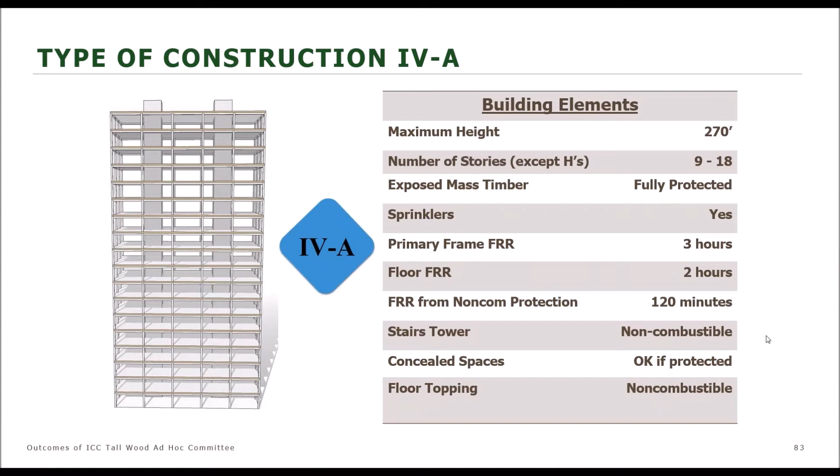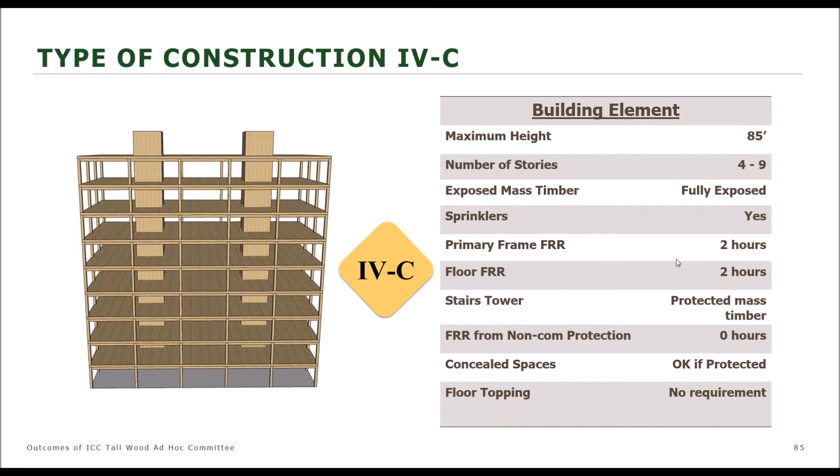Type 4C, this corresponds to the current height limit for a sprinklered heavy timber building as it stands in the code right now. Stories could be increased over what's permitted in the code right now though. Mass timber can be fully exposed, but of course, not in the concealed spaces, not for the stair towers, not for other shafts through the building. Those do have to be protected. Still have the high type 4B ratings, 2 hours, and so forth.

Nice schematic that compares these. The total building areas are listed below here. Again, this total building area would have to be spread out between all these floors. This is not a single story area, it's a building area. And you have to divide that by 18 to get the allowable floor area in that case. This is current heavy timber here. So you have those total building areas that might be helpful.

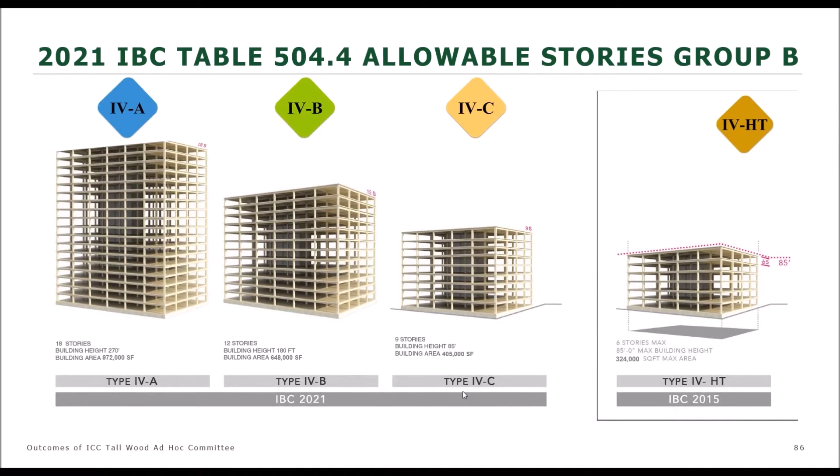And I think we have another poll question. Let's see. One more, and this is the last one. So for certain occupancies, which is true regarding maximum height and number of stories for proposed types of construction? Type IV-A can be 270 feet and 18 stories. Type IV-B can be 180 feet and 12 stories. Type IV-C can be 85 feet and 9 stories, or all of the above.

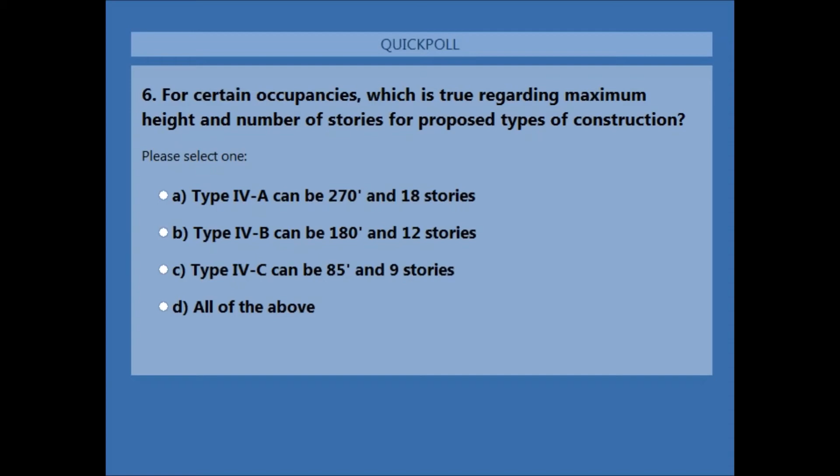All right, and so if we have time for question and answer, I'm going to close this. And so 87% say all of the above. And are they right? They're right. Excellent. Well done.

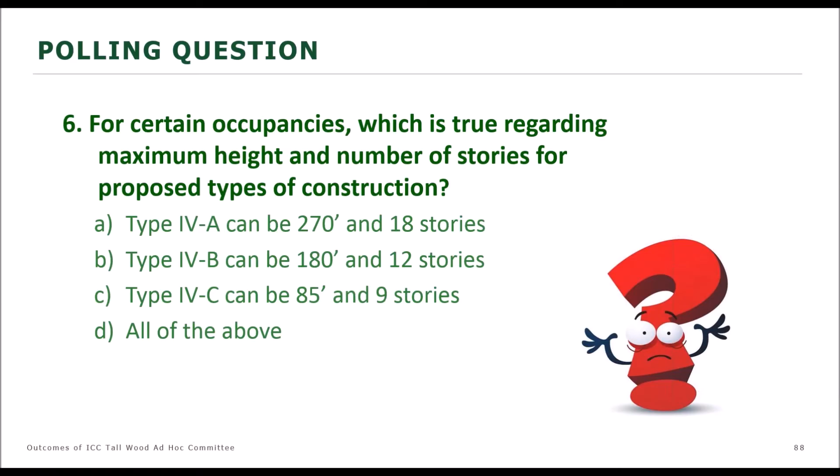I think we're going to turn it over to Buddy Showalter. Buddy? Okay, Paul and Jason, thank you both very much. There's a question about the ATF tests and just the fact that those were fairly open, ventilated test structures. Was that on purpose? Is that representative? Talk a little bit about that whole test setup. Sure, yeah, I'd be happy to.

Yeah, the TWB committee made the decision to have that size opening because it basically represents a case where you have a curtain wall on one whole side of the building. In fact, in a lot of cases, you might actually have curtain walls on more than just that one side. But for the purposes of data collection and also making sure that the entire plume went up into the hood in the test lab, it was necessary to keep all of the openings on just one wall.

Typically, there would be a glazed curtain wall on a building like that. In fact, in tests 4 and 5, there was a glazed curtain wall installed on those openings, and you could see the effects; that basically stifled growth of the fire because of lack of oxygen. And so the TWB committee wanted to ensure that the fire had a chance to get going and that it would reach flashover, and so they opted not to put glazing on wall A, over those openings, in order to ensure that the fire actually did get going.